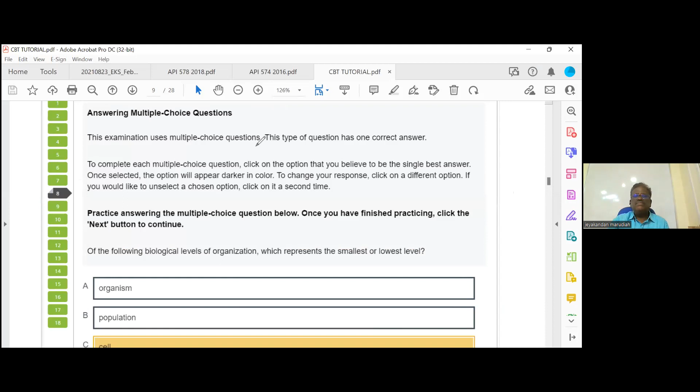So simple multi-choice. I told you about the API 570 exam. First one is closed book. You'll have 110 questions, and the time is 2 hours 45 minutes.

There are 4 patterns of questions they are using that you have to attend, but the majority of the questions will be simple multi-choice. So pattern A is simple multi-choice, and that will have around 100 questions. So out of 110 questions, 100 will be simple multi-choice.

So what is meant by multi-choice? You will have a question with 4 options. For example, of the following biological levels, which represents the smallest or lowest level? We have 4 options: organism, population, cell. You have to click whichever you think is correct. If you want to change the answer, any number of times you can change it. You can play with that - I can change to B, C, D, anything. The final answer picked will be what the system records.

Almost the same simulation we have on our website. So if you go to our website, oe.boonindia.com, we'll have a set of questions. For example, let us start with this. I think most of you have NDT knowledge.

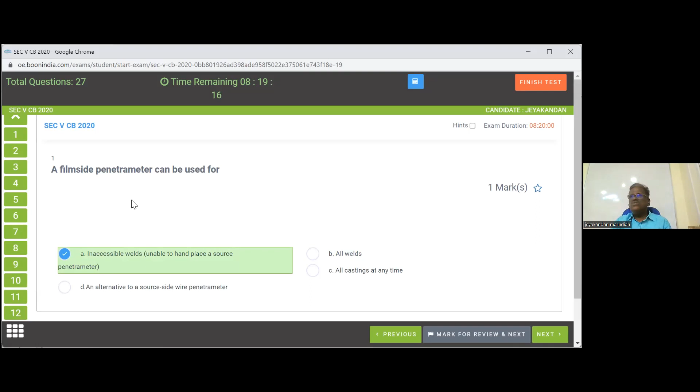Suppose if you want to change it, you can. The exam works the same way - you have to attend the question, then click next to move on. Once you attend the question, you can change it and there will be a color change. Even in the exam, suppose you want to directly attend the 12th question - you can touch that point and go there, then directly come back to the third question. You can jump here and there. Very simple system, no problem.

Suppose here it's not possible - but in the exam, you can highlight the question, strike through part of the question, or strike through the answers. All these are possible in the exam. So 90% of the questions, out of 110, 100 will be the same pattern.

Simple multi-choice question. We have 3 other patterns: multi-response, drag and drop, and extended matching. Together these will have around 10 questions - generally three questions like this.

Now, what is meant by multi-response? Let me finish, then you can write it down. Each question will have 2 or more answers.

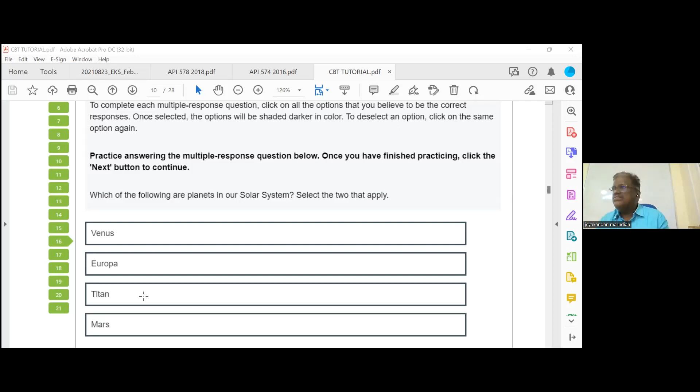So either it will not be 1 or it will not be 4 - all cannot be the answer, generally it will be 2 answers, sometimes rarely 3. Now the problem with attending this question is there is no partial marking - even 1 right and 1 wrong means 0 marks. So all answers should be correct. If the answer is 2, you have to pick both correctly. This is called multi-response. We will give you practice maybe at the end of the course.

Then the third pattern is called drag and drop. What is meant by drag and drop? We give some options, for example: December, horse, June, dog. We may have 1 box or sometimes 2 boxes, for example, months of the year and animals. So December and June are months of the year - you have to click it and drop it here. The system will work that way, so the answer sheet will look like this.

Months of the year, June, December, animals - again, there is no partial marking. Recently they changed a small thing in this. Instead of giving 2 boxes, they will give only 1 box. For example, they will ask only months of the year, so out of 4 you have to choose which are the months of the year. Is it clear? That is why I told you a simple multi-choice is 90% of the question.

So the remaining 10% can have a combination of these 3 patterns: multi-response, drag and drop, and finally extended matching. Extended matching means you have to match this - for example, put a line like this. So dog, canine; cat, feline; cow, bovine. How do you match it? You click this one, and whichever one you want to match, click that one, and the system will automatically draw the line.

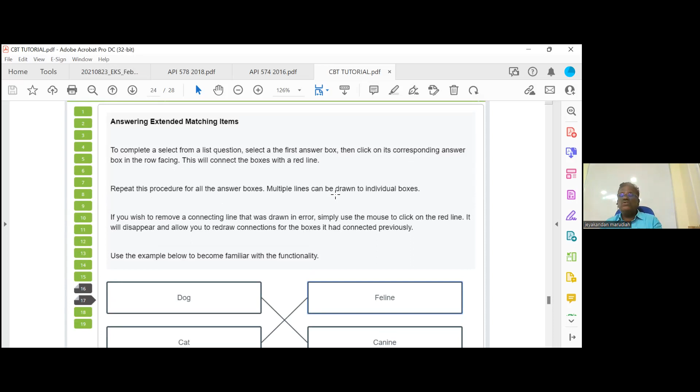This is important, what does it mean? Suppose this can match with 2 also - for example, if you want to make a line here and there's already a line, and this and this also feel like correct answers, click here and there will be another line also. It is not like that - exactly they will match this one. And if you wish to remove the connected line that was drawn in error, simply use the mouse to click on the red line, and it will disappear.

Once you complete the closed book exam, there will be a 45 minute break. Only 45 minutes is allowed, but you can come back before 45 minutes if you want. Then you can start the exam, or you can continue the exam without a break - that is also allowed. It's an optional break, because when you close that, the system will ask whether you want to continue the exam or close the exam. Generally, go for close. So go refresh yourself, go outside, then come back, and then you can start the next exam.

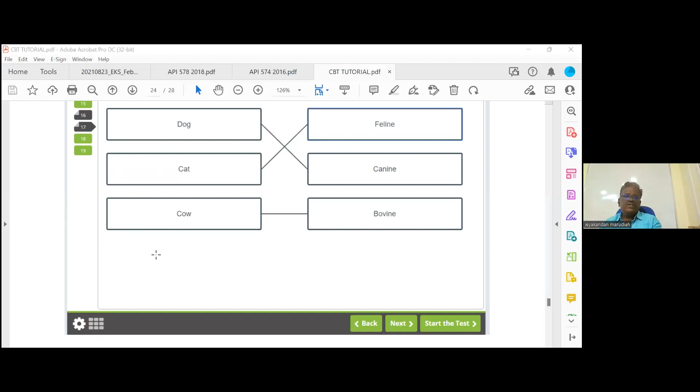What is meant by open book question? All the code books will be available in the system itself in PDF format. You can see the PDF format is for the 510 exam actually, 510, 571. So whichever code book you want to select, you can open it and go to the particular section and find the answer.

Now many people ask, can we use Control F? You cannot use it - it will be deactivated, it will not work. But all other PDF functions will work. You can click the content directly and it will go to the page - the HTML link from one area to another, all links will work in the PDF except Control F, point number 1.

Second question many people ask: how do I know which code book I have to refer to? There will be no indication. Third, people ask if it will be first this code book's questions, then the next code book - it is not, it will be completely mixed. So once you attend the class, you come to know by seeing the question, you can find it out. If you are fresh, it will be very difficult - but by seeing the question, you can easily find out which code book to refer to.

But some questions will have a little confusion because they are covered in 2 code books, so first you have to check one code book - if the answer is not there, then check another code book. But I can guarantee that if you attend our class properly, at least 50% of the open book questions you can answer without opening a book. Even in the open book exam, not all questions are tough - 50% of them you can find the answer just by seeing the question, without referring to the book.

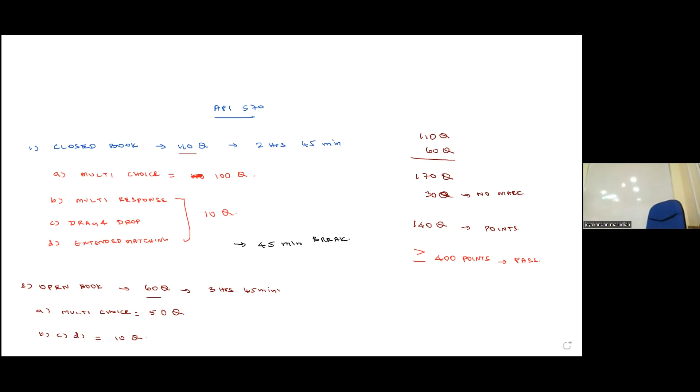Okay, shall we continue? The next thing is how to prepare for the 570 exam. It is purely a code book exam.

The first document you have to refer for your exam is called the effectivity sheet. This is the document you have to refer for your exam, which we've given you as printout or soft copy also you can get it.

This is applicable for all 2022 exams. Even if somebody is writing an October exam, there is no change - same syllabus only, same code books only. So what are the code books you have to refer?

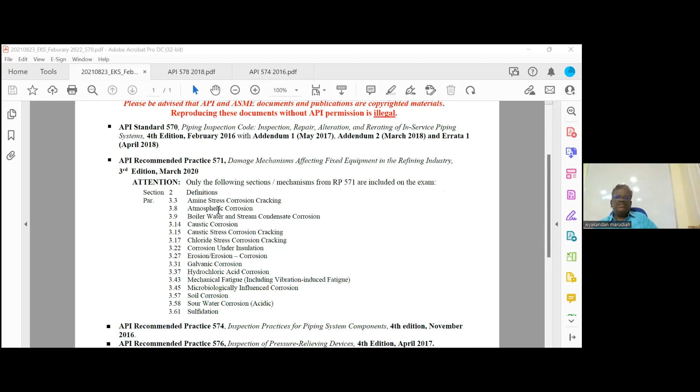570, the original edition is 2016 with the 2018 addendum. 571, we have 15 damage mechanisms. 574, and 576 has only a few selected sections. 577, that is the 2020 edition. 578, and on the ASME side we have Section 9, Section 5, B16.5, and 31.3.

So we have 1, 2, 3, 4, 5, 6, 7, 8, 9, 10 code books - we have 10 code books. The exam questions will be asked, generally at least one question from each code book.

But now, so many people think we have 170 questions total and 10 code books, so 170 divided by 10 is 17 questions each. It is not like that - all code books are not equally important. Only a few code books are more important.

For example, the general exam pattern is this - the general exam is asking most questions from 570. Around 85 to 90 questions will be asked from 570.

The second important one is 571, so 20 to 30 questions. B31.3 will have 15 to 20 questions. 574 will have 8 to 10 questions. 578 will have 4 to 6 questions. 16.5 will have 2 to 3 questions. 576 may have only 2 questions because it was recently included.

And then common codes - I highlighted these in red because they are common in the 510 exam and 653 exam also. Section 5 will have 6 to 8 questions, Section 9 will have 8 to 10, and 577 will have 6 to 8 questions. This is the general pattern, but they use around 6 to 8 different sets in the exam.

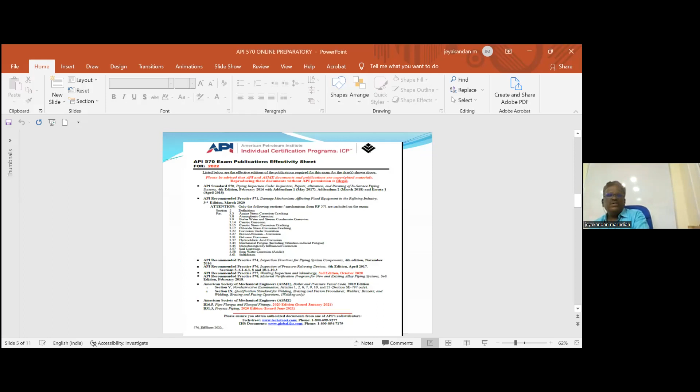Pressure, this is not referred for you, it is 570. So we will have PSI and PSIG. What is the difference when PSI means pounds per square inch? PSIG means gauge pressure, but everywhere we are using the gauge pressure only. So this is one important point.

And temperature, the exam question will be based on Fahrenheit. We are familiar with centigrade. No need to convert, just try to remember in Fahrenheit, try to remember in PSI. So if you want conversion, this is the conversion: Fahrenheit is equal to degree centigrade multiplied by 1.8 plus 32.

And the thickness, very very important. You should know inch, foot, and mil. There are 3 units for the thickness. 1 inch is equal to 25.4 millimeter. 12 inches is equal to 1 foot. This is the symbol for inch, this is the symbol for foot. And 1000 mil or thou, both are same, is equal to 1 inch, or 1 mil is equal to 0.001 inch.

Then if you want mil to mm conversion, 40 mil is equal to 1 millimeter. This is the conversion. So you have to remember pressure in PSI, tensile strength also PSI, then temperature in Fahrenheit only you have to remember, and the thickness in inches, foot, generally foot we will not use. Inches everywhere we will use, and mil also we will use. Mil means 1000 mil is equal to 1 inch. Mil is a very small unit. Mil or thou both are same. Radiography IQI, we are using thou. That is same, mil, thou both are same.

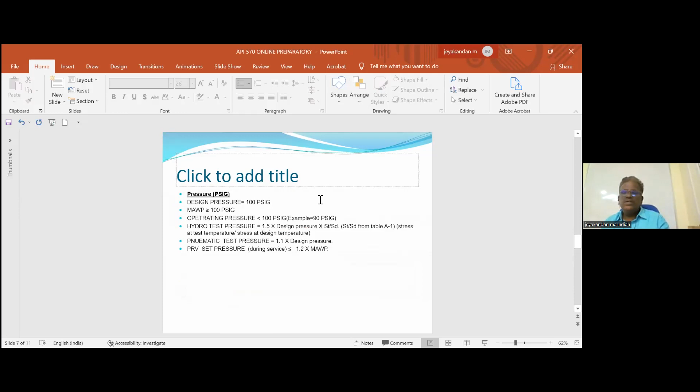So what is the meaning of less than, say, 3/4 inch? Less than 3/4 inch means, is 3/4 inch included or not included? Not included. So you have to understand the code. Less than means 3/4 inch, not included. So if it is less than or equal to 3/4 inch, then 3/4 inch is included.

Okay, another standard code terminology is, for example, 1 inch through 2 inch. What is the meaning of this? Now, is 1 inch included or not? 2 inch, so both 1 inch and 2 inch are included. So through means both 1 inch and 2 inch are included.

Next one, greater than 1 inch. What is the meaning of this? Greater than 1 inch, is 1 inch included or not included? Not included. So you should be very careful. There will be 1 or 2 questions testing this type of code interpretation. Okay, the answer will change, so you have to know greater than 1 inch means 1 inch not included.

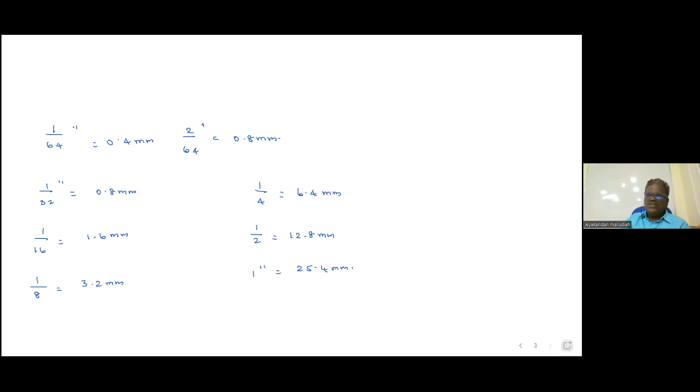The next question, what is the difference between pipe and a tube? So pipe, tube, we are using 2 terminologies. Pipe means the diameter. You know what is diameter? We have 2 types of dia, one is ID and another one is OD. Pipe, which diameter generally we mention? I always mention OD or ID pipe. OD. Pipe means if the diameter is expressed in NPS, that is called a pipe.

Tube means if the diameter is expressed in the actual diameter, that is called a tube. For example, if you put NPS 2, that means pipe. OD 2 inch, that is tube.

When you are putting NPS 2, you should not use the inch symbol. NPS means nominal pipe size in inches, so inches is already part of the NPS. So if you write it with inches, that is not correct. For example, you should write only NPS 2, that is the correct way to write. If you write NPS 2 inches, then this is wrong.

For example, if I write OD 2 inches, then it is considered as a tube. This is considered as a pipe. Is it clear? What is NPS? Nominal pipe size in inches. We can tell mm also, mm we call it as DN. DN means nominal diameter in millimeter. But for API exams, we will use only NPS. Is it clear? Now the question is, NPS means whether it is ID or OD.

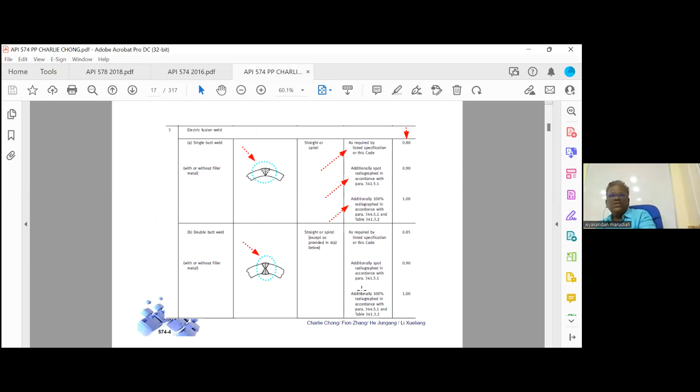So how can pipe be manufactured? Seamless, welded, cast. For our exam only, we will discuss seamless and welded pipes. Our exam scope is very limited - the exam question will be based only on carbon steel pipes, not stainless steel pipes. There will be no questions on that.

Now, what is the under tolerance allowed for the pipe? If it is under tolerance, it means thickness under tolerance. Dia under tolerance is there too, but it is not important for exam. Thickness means suppose you are ordering a 10 mm thickness pipe. When you receive the pipe, it is only 9.5 mm - is it acceptable or not? For seamless pipe, maximum allowed is 0.3 mm...

Sorry, seamless pipe - it is acceptable. Seamless pipe tolerance allowed is 12.5%. So even instead of 10 mm, if it is 8.75 mm, still it is acceptable. But if it is a welded pipe, only 0.25 mm is allowed. 0.25 means 10 minus 0.25 will be 9.75 mm it should have.

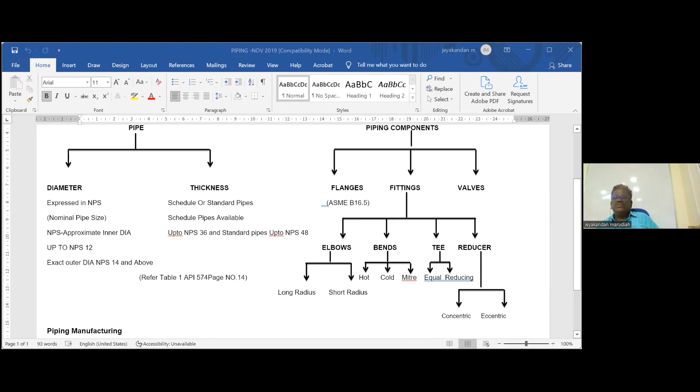Now if we come to the piping components, we have flanges. 16.5 is there, part of our exam. Fittings, we have elbow, long radius and short radius. Bend, we have hot, cold and mitre bends. T, we have equal and reducing T. And the reducer, we have eccentric and concentric. Then we have valves. This is the one I told you, we'll give printout, no problem.

Okay, now, what about the valves? What are the different types of valves we have? See, valves are covered in two code books actually. 576 also covers valves and 598 also covers valves. What is the difference with 598?

It talks about the flow regulating valves, not pressure relief valves. Pressure relief valves are covered in 576. Pressure relief valve is safety valve, relief valve. When the pressure exceeds, they will open. Flow regulating valve is gate valve, globe valve. This type of valves we call flow regulating valves.

I will play a short video, so just you can watch this. It will give some idea about the valve.

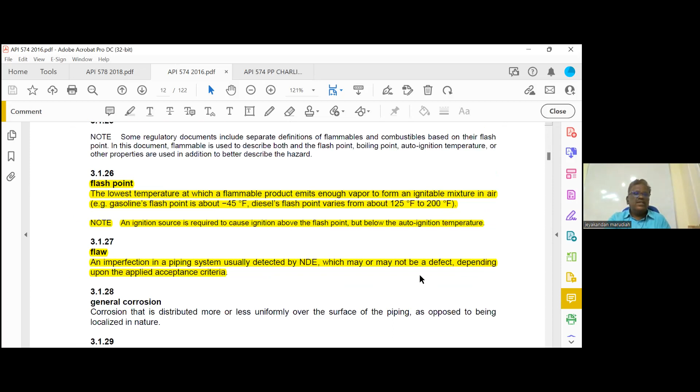Okay, right. So please take terms and definitions. These are not important. Straight away go to page number 12. Please take page number 12, piping components.

Right, see how our class system is. We have highlighted and printed. So we have edited some books, but some code books we have given a full book. Some code books we have edited, which is required for exam. Exam also will get almost same version only. They will not give the full code books, only required chapter only in the exam.

Second thing is, you can see it is highlighted and printed. And apart from that, I will have some underlined here. These are, you have to highlight it. That's why we provide you the highlighter. And some area there is a marking like this, CBQ. CBQ means closed book question. It was asked in the previous exam. That area you have to concentrate when you are reading for your exam. That is the way each and every code book you will go through it.

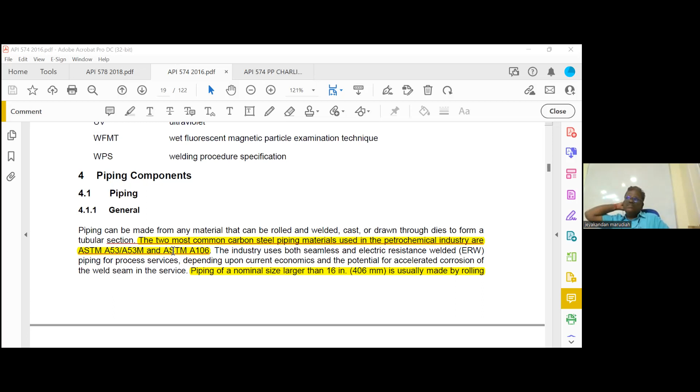So first, some of the important statements. Highlight the second line. The two most common carbon steel piping materials used in the petrochemical industry are ASTM A53 and ASTM A106. These are the two materials. Generally, your exam question will be based on A106 grade B, normally used material, or ASTM A53, sometimes ASTM A333 grade 6. Only carbon steel based exam questions will be there.

Then go to the next page. Second paragraph, highlight this. Pipe wall thickness are designated as pipe schedule in NPS up to 36 inches. So schedule pipes, we have up to 36 inches. This all I told in the previous session. The traditional thickness designation, standard weight, extra strong, double extra strong, differ from schedule and up to 48 inch. In all standard sizes, the outside diameter remains nearly constant. These three lines are important.

The size refers to the approximate ID of standard wall pipe, NPS equal to or less than 12 inch, and the size denotes the actual OD for NPS equal to or greater than 14 inch. So NPS 14 inch above, NPS means actual OD.

Page number 30, sorry, page number 13, second paragraph, highlight these 4 lines. The size denotes the ID for 12 inch, the size denotes the OD for 14 inch and greater than 14 inch.

You remember I told the pipe can be manufactured seamless, welded, cast. What is the under tolerance for seamless pipe? 12.5%. It was asked in the closed book question. So highlight this one, mark as CBQ. CBQ means it was asked in the closed book question. The actual thickness of seamless pipe can vary from its nominal thickness by as much as 12.5% due to manufacturing. The under tolerance for welded piping is 0.01 inch or 0.25 millimeter. Cast piping has the tolerance of plus 1/16 inch and minus 0 inch. So this is important, you should know the thickness under tolerance.

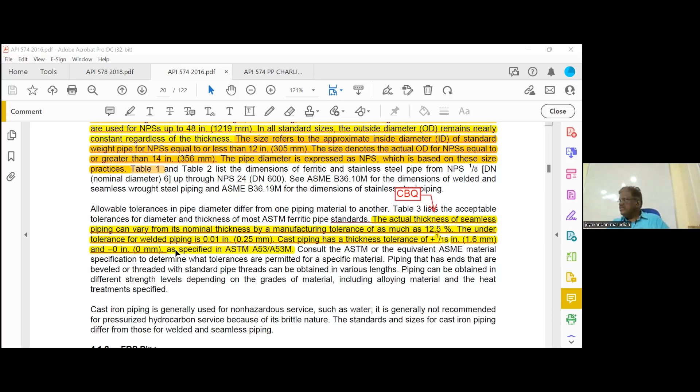Right, next page. You can see Table 1. This table you must use for your exam, open book exam. This table definitely you have to use, because for example, 14 inch - what is the OD of the 14 inch? It will be 14 inch NPS, but NPS 12 OD will not be 12 inch. It will be more than 12 inch. So what is the actual value? You have to refer this table and find it. So this is marked as an open book question. Let us see what are the important things.

I will go to the next page. For example, if we take NPS 6, next page, page number 15. What is the OD of NPS 6 in inches? NPS 6 outer diameter, what will be the outer diameter? 6.625 inches. Because remember in API, I told you 570, there is a thickness calculation, pipe thickness calculation.

The formula you have to use OD. Exam question, they never give OD, they will give NPS. So OD you have to find from this table, for example. They will ask exam question: what is the minimum thickness of the NPS6 pipe with the design conditions, some design condition? So the formula, there is only OD, you have to use it. OD you have to find from this table. So you can see what is the NPS6 OD - it is 6.625.

But you can see the thickness also in inches. For example, schedule 40 and standard will have a thickness of 0.28. If you have schedule 80 and extra strong, it will have the same thickness of 0.432. Then schedule 120 will have 0.562. So if you want to check some schedule or standard pipe thickness, again I repeat, we will always use inches, never millimeter. So in this table, NPS is important, actual OD in inches is important, schedule, class, and nominal thickness in inches - these are the things you may need for your exam.

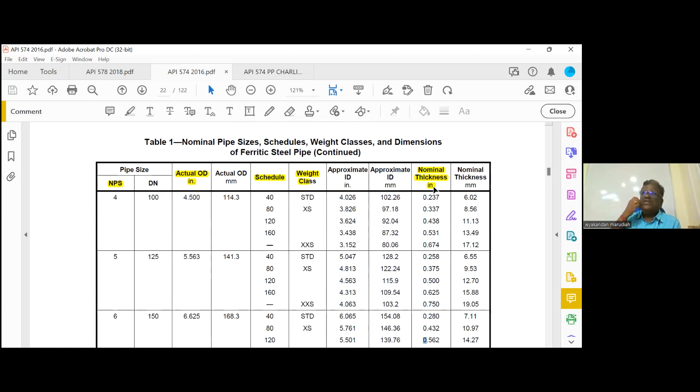You can see here, 6-inch OD 6.625, 8-inch OD - what is the OD of 8-inch? 8.625. 10-inch, 12, 14, 14 - so when it comes to 14, the OD will be the same. You see, after 14 it will be the same: 16, 16, 18, 18, like this.

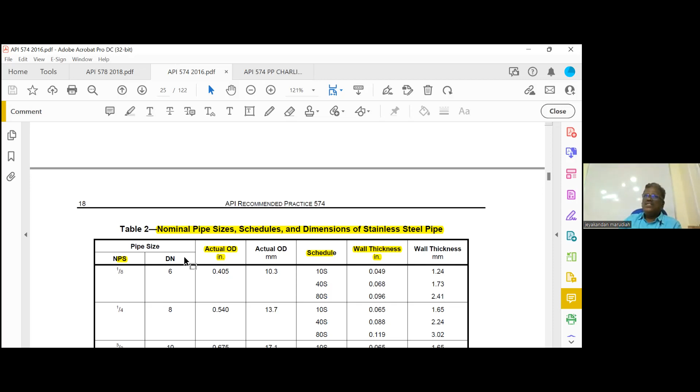Now go to page number 18. Stainless steel pipe. Stainless steel pipe schedule will have suffix S. For example, schedule 40 means it is carbon steel and low alloy. Suppose schedule 40S - S for stainless steel. Stainless steel have even schedule 5 also there - you can see here 10S, 40S, 5S also there. So for stainless steel, if anything, you have to refer this table.

But from the exam point of view, we may not use this table. Generally, the question will be based on carbon steel. Practically, if you are working with stainless steel, to find out the schedule thickness, you can use this table. Otherwise, these are not important.

Now, please go to page number 20. We are going to check two code books actually - one is ASME B31.3, second is API 570. What is the difference between B31.3 and 570?

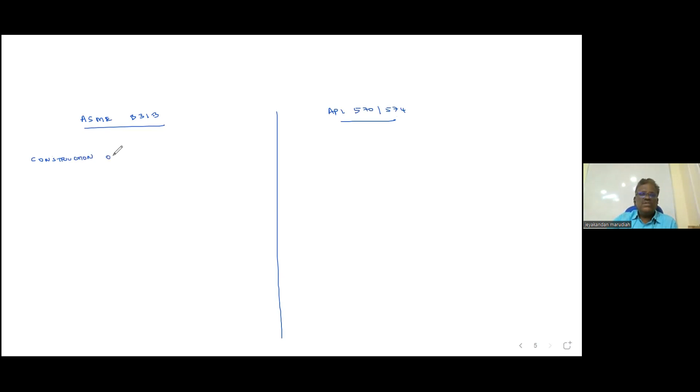B31.3 talks about the construction of piping, process piping. Whereas 570 talks about the in-service process piping.

So just to understand this, you can write after that. What is meant by construction? Construction means design, so you should have some basic knowledge about design. And then you should have basic knowledge about the material. Then fabrication, welding, NDT, PWHT, testing. Testing means after completing, you have to do hydro test or pneumatic test. Everything will be covered in construction.

In service means once it starts operation. So in service, what are the things? In service inspection, repair, alteration, re-rating - that is the in-service part. We will use these things repeatedly. We have a 10 days program, so the first time it may be a new word, but every time you repeat, you'll become familiar with it.

Now, construction - how is piping classified in the construction part? B31.3: first classification is based on COF. So what is COF? Anybody knows? Consequence of failure. What is meant by consequence of failure?

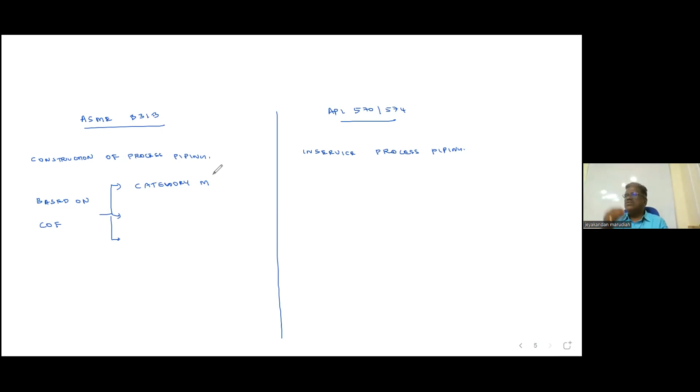So what is meant by category M? I will briefly explain, we will see in B31.3. Even a small leakage will have very serious consequence. For example, poisonous gases, highly flammable fluids like petrol. These are called category M. Just the opposite is what we call category D.

Category D means all utility systems. Utility means airline, water line. Even a major leakage will not have a serious consequence. In between, we call it normal fluid.

What is the definition of normal fluid? It is neither category M nor category D. Not highly dangerous, not no danger at all - it is in between. Now, majority of oil and gas piping will come under which category?

Normal fluid, answer is normal fluid. Majority of the piping - for example, natural gas, fuel gas, hydrogen gas, all gas lines - majority of the lines will come under normal fluid. Category M, only few lines come under that.

This three classification is only for our exam, but in B31.3 we have many classifications. Apart from that, severe cyclic piping - if you want, you can add severe cyclic also.

Severe cyclic means the pressure or temperature is fluctuating - that is called cyclic load. Cyclic means it is not a uniform pressure or uniform temperature, it is fluctuating frequently. That is called severe cyclic.

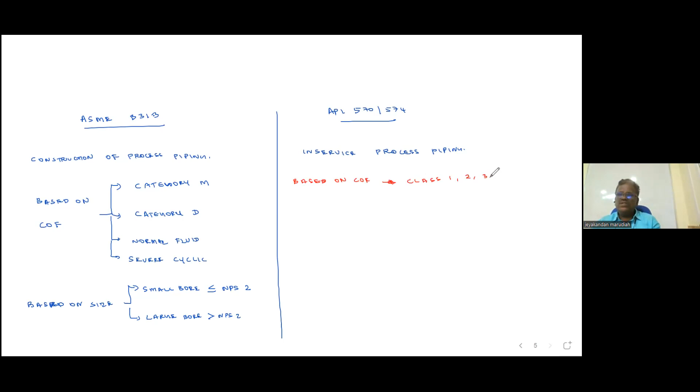In service piping, we are not using category D, category M language. There the classification changes: class 1, class 2, class 3, class 4. Highly serious is class 1, least serious is class 4 - it goes step by step. Class 1 is more dangerous, less serious is class 2, then class 3, class 4.

Then based on size: small bore, large bore. So the definition is same. What is small bore? NPS 2 inch and below - 2 inch is also small bore. Greater than NPS 2 inch, we call it large.

Now we have another classification also, based on processing - based on process we have three classifications: primary process piping, secondary process, auxiliary.

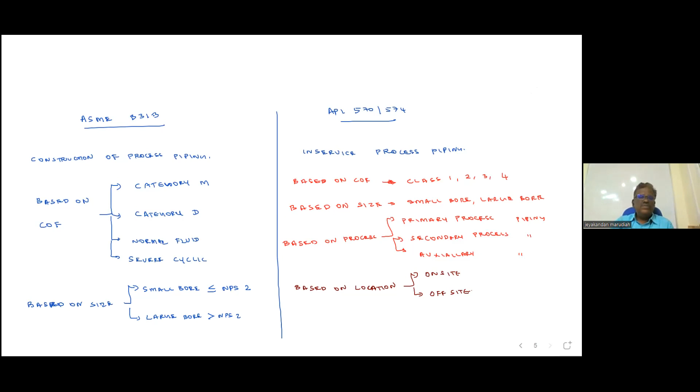Okay, now we will go back to this code book. You can see here, page number - small bore piping, secondary piping, and the auxiliary piping.

So small bore piping can be used as primary, secondary, or auxiliary piping. Nipples, generally piping nipples they are using, are 6 inch or less in length. When you are connecting a small bore piping, they will use pipe nipples that will be 6 inch or less in length. Just to highlight this one, these are not very important.

Then please go to the pipe linings, page number 23. Just a minute, time, page number.

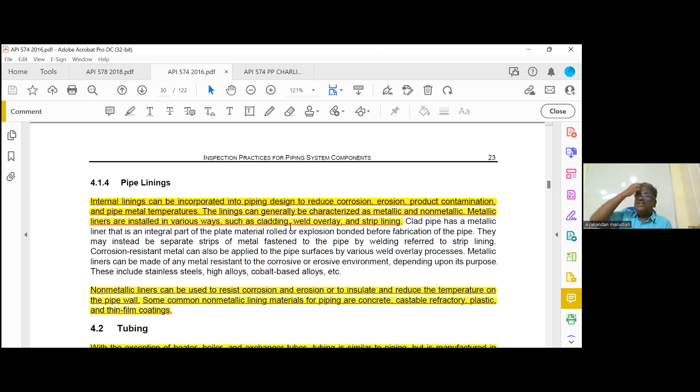Highlight this one. See why we are asking you to highlight - maybe so far there was no question asked in the exam, but every exam there will be a change, they will add some other area question. That's why these areas are important, that's why we are telling you to highlight these areas.

And non-metallic liners can be used to resist corrosion and erosion, or insulate and reduce the temperature of the pipe wall. Some common non-metallic linings for piping are concrete, refractory, plastic, and thin film coatings.

Highlight this also. Then what is tubing? So I already told you, tubing means two conditions: actual OD, actual thickness, small bore.

So with the exception of heater, boiler, and exchanger tube, tubing is similar to piping, but is manufactured in many ODs and wall thicknesses. Tubing is generally seamless, but can be welded. It is stated in terms of actual OD rather than NPS, so we are using the actual OD only, not nominal pipe size.

Tubing is usually made in small diameters and mainly used for heat exchangers, instrument piping, lubricating, steam tracing, and similar applications. So it is not used in the main process.

Now we will come to the valves. You have seen the valve video. Now just briefly, what are the things you should know about valves? So first...

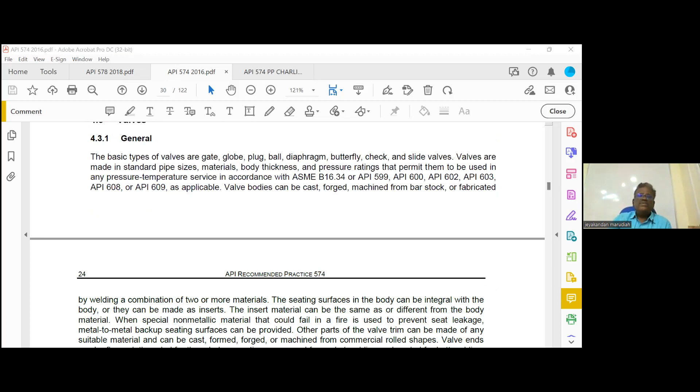Right, first gate valve. So these are called gate valves. What is the gate valve? Why is it called a gate valve? The valve with a gate - there is a gate which will be closed, between the wedge there is a mechanism to close it. So what are the important things you should know about the gate valve?

First thing is they should be used only in full open or full closed position. They are not for controlling the flow. You should not use it half open - you should be either fully open or fully closed. What will happen when you keep it half open? Any debris will hit the gate, will damage the head, then the valve will start passing even after closing. Gate valve should be either fully open or fully closed position.

Point number one. Second point, they should not be used for flow control. Now there are two types of gate valves: full area port gate valve or reduced port gate valve.

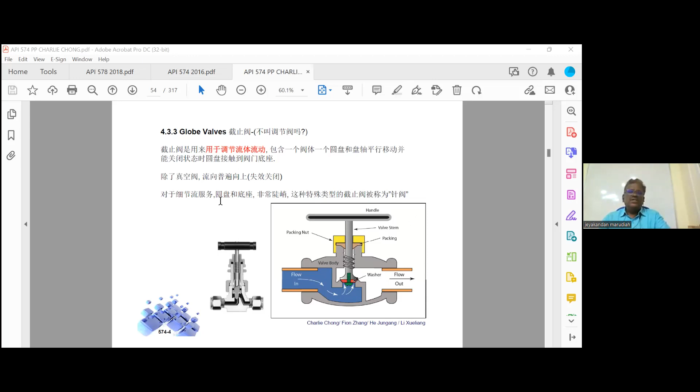Then another special valve is the diaphragm valve. What is meant by diaphragm valve? Suppose inside you have a highly corrosive liquid. When you use a gate valve, what will happen? The liquid, when the valve is closed, will be in contact with the gate, so it will corrode the gate, damage the gate. To avoid that, they will use a thin film as a barrier.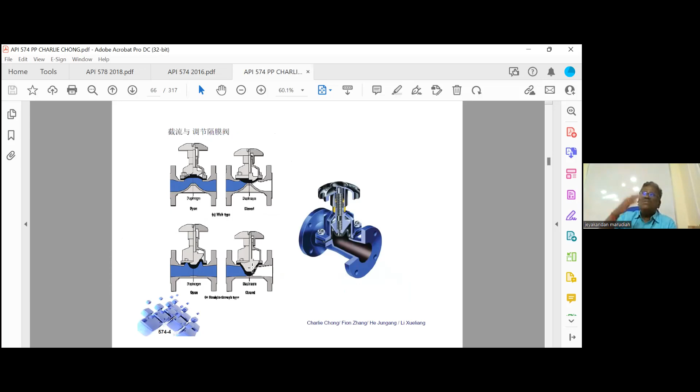You can see here, the black one is the diaphragm, and the blue one is the liquid. It will not allow the liquid to contact the gate, so it will protect the gate from corrosion. That is called a diaphragm. The purpose of the diaphragm valve is to protect from highly corrosive liquids.

Then butterfly valves, this we are using in the water line. What is the butterfly valve? Again, I told you, it's a 90-degree rotation valve, where we are using coarse flow control. What is meant by coarse flow? Even some leakage or passing will not cause serious problems. The water line need not be completely tight, even a small pass will not have a force, it's just flow control only.

Then finally, this is important, the check valve. What is meant by check valve? Non-return valve, which means flow in only one direction is allowed. It will not allow reverse flow. So we have swing check, piston check, and ball check valves.

Then slide valves, the gate is in high temperature. The gate is sliding, that is called a slide valve instead of moving. Now, these are the fittings and the flanges. So please go to the code book. Valves, just to highlight this one, gate valves, page number 24.

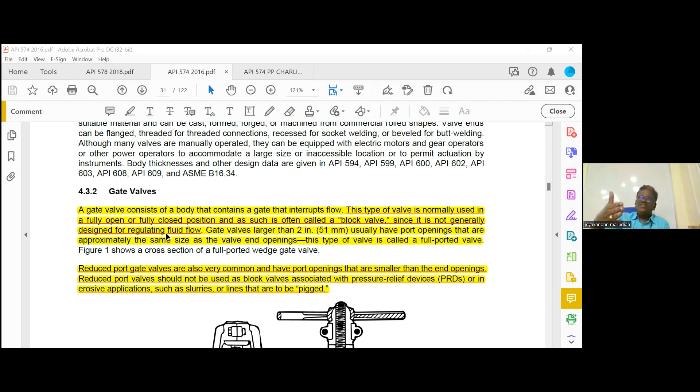A gate valve consists of a body that contains a gate that interrupts the flow. This type of valve is normally used in a fully open or fully closed position and is often called a block valve. There's another name for gate valve, block valve, stop valve, all are other names of gate valve. Highlight this one: since it is not generally designed to regulate fluid flow, why is it called a block valve? It will block, that's all. It will not allow regulation, small liquid will not be allowed.

Then highlight the second paragraph. Reduced port gate valves are also very common and have port openings smaller than end openings. Reduced port valve should not be used as a block valve associated with pressure-relief devices or in erosive applications such as slurries or lines that are to be pigged. When you are going to install here or launch a pig inside, reduced port valve should not be used.

Then globe valve. Highlight the first two lines. A globe valve, which is commonly used to regulate the fluid flow, consists of a valve body, circular disc that moves parallel to the disc axis.

And the fourth line: for fine throttling service, a very tapered seat can be used. This particular type of globe valve is referred to as a needle valve. That valve is called a needle valve, or when it's a small globe valve it's called a needle valve.

Plug valve, ball valve, these are not important. Then go to the diaphragm valve, page number 26. A diaphragm valve is a packless valve, 4.3.6.

Highlight the first two lines. It contains a diaphragm made of flexible material that functions as a closure and seal.

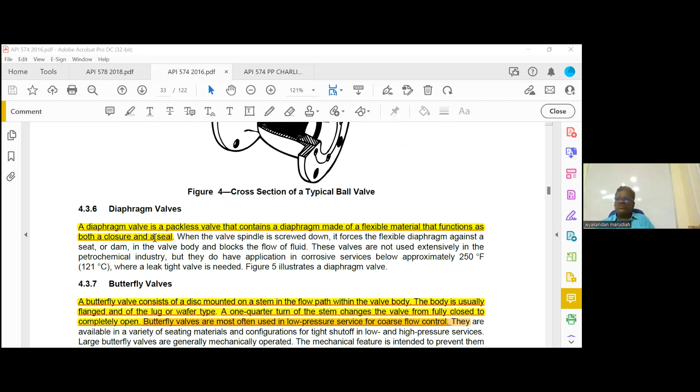Then butterfly valves. A butterfly valve consists of a disc mounted on a stem across the flow path within the valve. The body is flanged and lug-wafer type, 1/4 turn with stem. Butterfly valves are most often used in low pressure service for coarse flow control. That line is important, so they are used for not fine control, that is coarse flow control.

Then check valves, page number 28. A check valve is used to automatically prevent backflow. That line is important - what is the purpose of a check valve? To prevent backflow. The most common types of check valves are swing, lift, piston, ball, and spring loaded.

Then slide valves. A slide valve is a specialized gate valve generally used in erosive or high temperature service. It consists of a plate that slides against seats. So these are the fittings. These are not important.

Just skip this. Pipe support also skip. Then please go to page number 33.

Flexible hoses - this is important. See where we are using the flexible hose. For example, it is summer season, suppose you are running out of water, so generally what they will do is order a tanker lorry, water tanker. So I will transfer the water by using a flexible hose. So generally flexible hoses are used for temporarily transporting the liquid, or it can be permanent also.

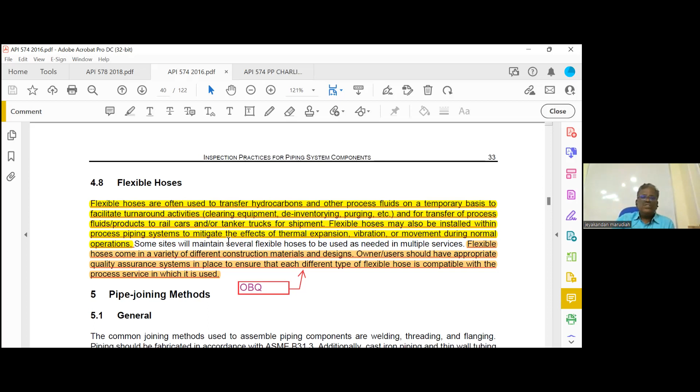Flexible hose may also be installed within the process to mitigate the effect of thermal expansion. This was asked in the open book question, the last 3 lines. Highlight it and mark it as open book.

Flexible hoses come in a variety of different construction materials and designs. The owner/user should have an appropriate quality assurance system in place to ensure that each different type is compatible. So the plant owner will decide what type of flexible hose you have to use with a particular system. This is the open book question.

Now, next one is pipe joining methods - how to join a pipe. So if you are straightly joining two pipes, what is this weld called? Butt weld or groove weld, we call it.

Then we can use a socket weld. So what is socket weld? They will insert a pipe inside and there will be a gap maintained - that is called a socket weld. So butt weld is generally preferred. Pipe to pipe, what we are joining is a butt weld.

So highlight this one - threaded joints. Generally we are using threaded also we can use, auxiliary piping in non-critical service, that line is important. You can use a threaded pipe. Even in our house, we are using threaded pipe, GI pipes, threaded pipes. That is a closed book question.

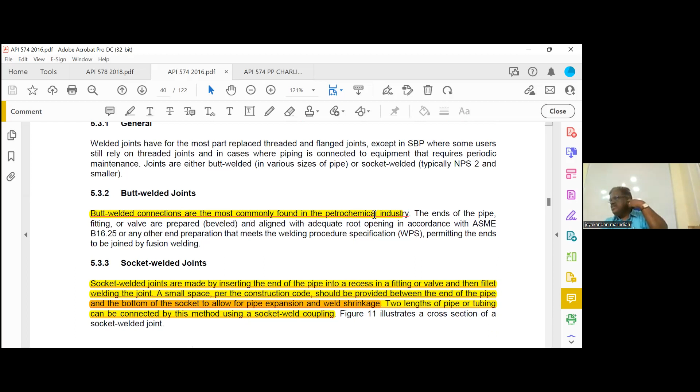Then welded joints, highlight 5.3.2. Butt welded connections are the most commonly found in the petrochemical industry. So we are using butt welding only for pipe to pipe joints. Then socket welded - socket weld joined by inserting the end into a recessed fitting and then fillet welding.

A small space, there will be a gap as per construction code. So what is the purpose? It should be provided to allow the pipe expansion and the weld shrinkage.

Then branch connections. Now, where will the piping generally fail during service? In the branch connection - only the branch connection will fail. A branch in a pipeline will take a beating because of the high stress. Highlight this one: a large number of piping failures occur at pipe-to-pipe welded branch connections.

That line is important, closed book question. Where will the failure come from? Pipe to pipe branch connections. The reason for the failure is often that they are subject to higher than normal stress caused by excessive structural loadings.

That's all introduction to piping. So this morning in just 1 hour we took introduction to API exams, then introduction to piping. So far in introduction to piping we have covered around 20 pages.

Maybe one question only from this. These are not important for the exam, but you have to understand what is meant by piping and what are the different components of piping. So far in exams they have asked where the failure will come - the answer is branch connections.

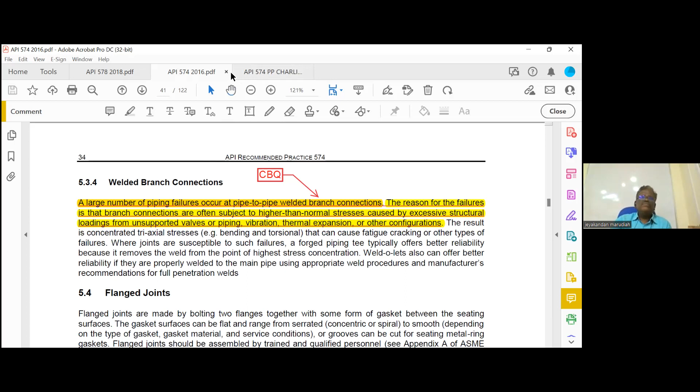Close this book. Please take API 578, material verification program. So we are going to start first with the material verification program, PMI. That is the first code book we are going to start. That was just the introduction we took.

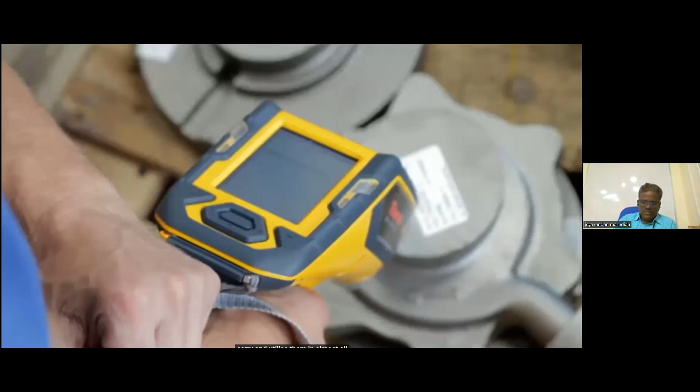Positive material testing of critical materials is no longer a choice but a necessity, including across the process, oil and gas industries. PMI, positive materials identification, is the most effective non-destructive means of ensuring that components utilized and or installed are to the correct specification, thereby minimizing any risk to equipment, facilities, personnel, or to the environment. Handheld XRF analyzers, such as those in the Niton range, are compact and lightweight, allowing operators and inspectors to carry and utilize them in almost all situations, including when working at height and even in the harshest and most challenging on or offshore environments.

Being able to move the equipment around the factory simply and easily is a real benefit to us. We have different areas of manufacture where we need to use it. Also, the speed of use is important in an in-process operation - we don't want to waste time or add time to the operation while conducting the use. Utilizing a range of analysis is very important to us. We use many different methods here, and we don't want to be setting the instrument up individually for different applications. I want to make it as simple as possible for the operator to grab the equipment and conduct the analysis.

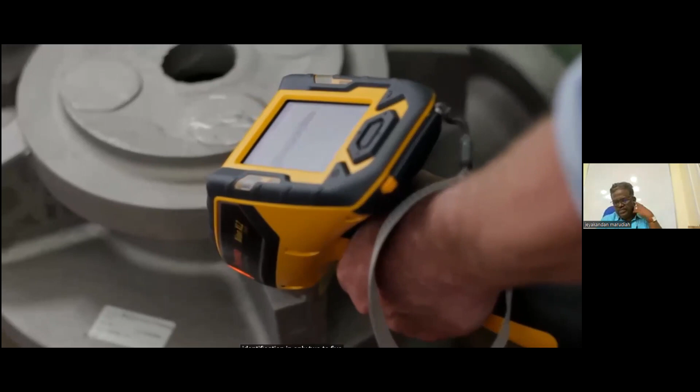The speed and accuracy of Niton instruments provide a laboratory quality chemical analysis and a positive identification in 2 to 5 seconds. Depending on contract requirements, we may have to do a positive material identification using the Niton equipment. This is usually done before the product goes into test to make sure it is the correct material before we proceed, usually with nitrile and various materials, working very accurately. It's extremely fast to use.

Niton UK's relationship with Sundyne HMD spans over 10 years, with the company having used 3 generations of Niton XRF analyzer, including the latest models. We've had a good relationship with Niton UK over the years. If there's a real problem, it gets resolved - it's easy to contact people.

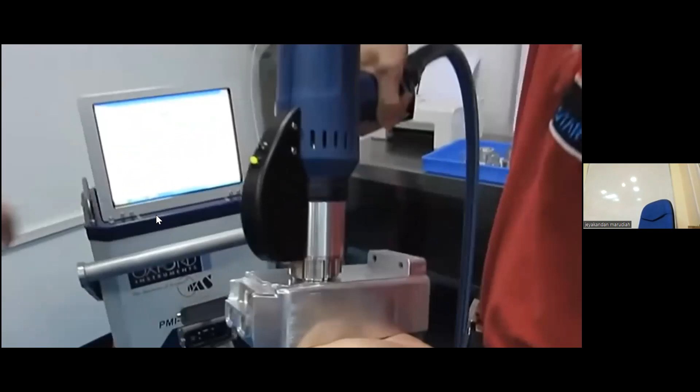Okay, we've already done 3 previous tests. This is the 4th test to get an average. The machine has analyzed the metal and it believes it is AlSi 0.5 when it should actually be 6061. So we're actually going to compare it to the 6061 database.

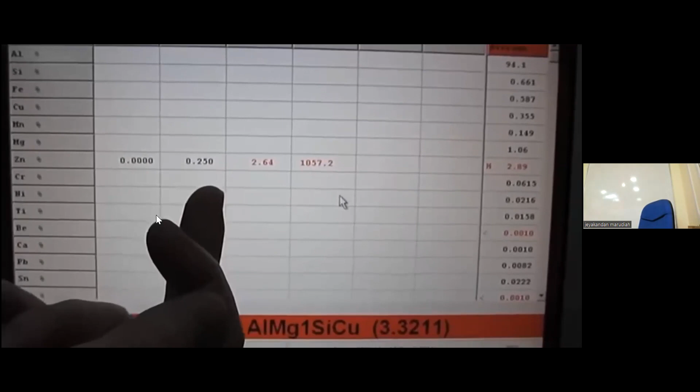Okay, now down the bottom here, we've got 6061 in red. Red means it is definitely not 6061. Above, it will show us where it is not 6061. The zinc should be between 0% and 0.25%. It's actually 2.64 points above where it should be. That's 1,000% too high. The actual average content is 2.89%. So we would actually reject this material as being 6061.

So this is yet another sample of 6061 supplied to us. Now we're going to do a test on it.

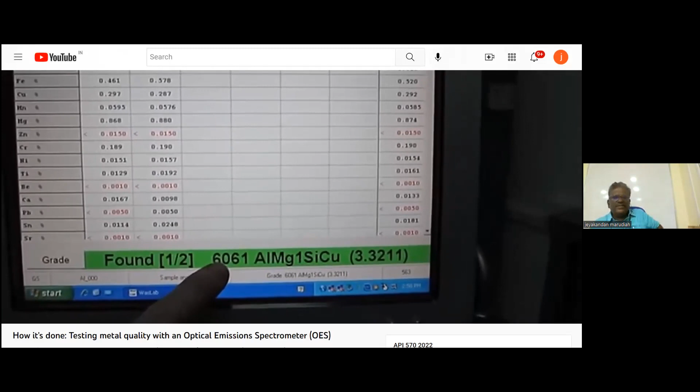That was the second of 2 tests, and you can see the results here. The machine has automatically compared the results to its database and determined that the material is indeed within specification for 6061. So now I'm going to print off that report, and whilst that's printing...

That there is the spark site on the finished part, and you can see some carburization. I've got some Scotch-Brite, and I'm just going to give it a quick rub. And as you can see, the witness mark is almost gone and it's smooth. We will ask customers where they want their spark site.

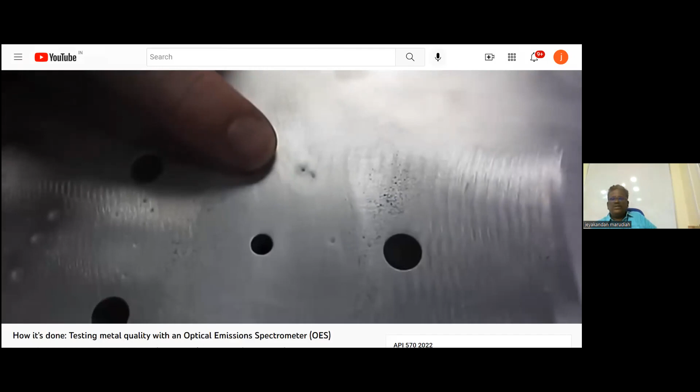Okay, this is the printout of the test results. We did 2 tests. It gives you the minimum, maximum according to the specification, and what the deviation is. We will actually put this in with the sample when we send it to the client.

Right, so the next one is laser-induced breakdown spectroscopy. LIBS is an analytical technique that has been used in laboratories for many years. Latest technological advances have made it possible to shrink LIBS into a handheld version. Most handheld LIBS analyzers are used for fast sorting of alloys in scrapyards, and alloy identification and analysis in various applications within the metals industry. How does LIBS work?

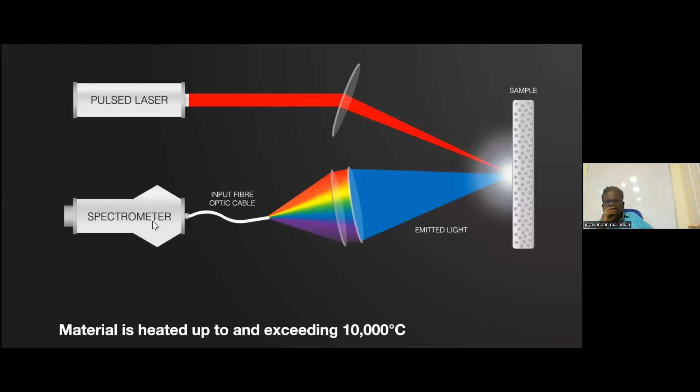During LIBS analysis, a focused pulsed laser hits the sample, removing a very small amount of material from the surface. The sample is hit by thousands of pulses during a typical 1-second measurement. The material is heated to and exceeding 10,000 degrees Celsius. The temperature is so high that the atoms actually break up and form a plasma. Despite these high temperatures, the sample does not get too hot during the analysis, so it can be held in your hand safely during the measurement.

What is happening within the atoms? When the high-power pulse laser hits the sample, the electrons in the atom's outer shells are ejected. Because electrons in outer shells are shielded by the inner shell electrons, they aren't strongly drawn by the nucleus. This means less energy is needed to eject electrons from the outer shells. The ejected electrons create a vacancy, making the atom unstable.

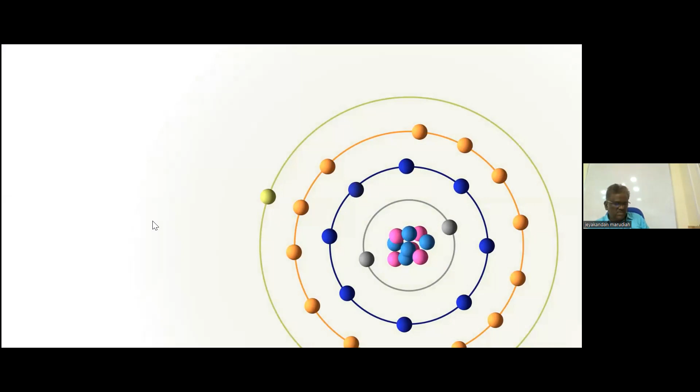When the pulse stops, the plasma starts to cool down, and the vacancy is filled by electrons cascading down from the outer electron shells. The excess energy released when electrons move between 2 energy levels or shells is emitted in the form of element-specific light. For a typical metallic sample containing iron, manganese, chromium, nickel, vanadium, and so on, each element emits many wavelengths, leading to a spectrum of up to thousands of peaks.

The wavelengths of light are collected through a fiber optic cable and then processed by the spectrometer. Each element is associated with a specific spectral peak. These spectra are quite complex, with potentially hundreds or even thousands of lines for each element. The concentration of the element is calculated from the intensity of the spectral peak.

Then an advanced algorithm is used to identify the sample type and calculate the concentrations.

Why do people choose the handheld LIBS technique? It is one of the fastest analytical technologies available today to identify and analyze metal alloys. It takes just 1 second to measure virtually any alloy, including aluminum alloys.

That's up to 20 times faster than handheld X-ray. The LIBS analyzer is very rugged because the detector is typically protected by sapphire glass, one of the hardest materials of the day, so you can safely measure sharp and pointy objects, including turnings and shavings. It is also very easy to use - just point, shoot, and read the results from the screen.

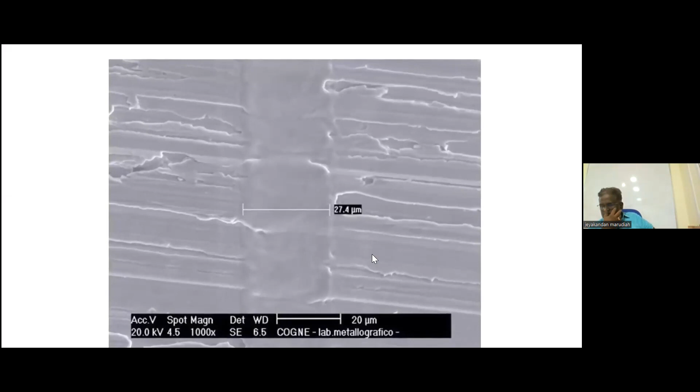The LIBS technique is virtually non-destructive. Following a LIBS analysis, the tiny burn spot left is so small it can hardly be seen with your eye. From a regulatory and licensing point of view, much less is required when the user deploys it.

Typically, no expensive licenses and time-consuming training classes are needed. However, it is important to check your local legislation issues, such as the use of safety goggles. We strongly recommend using safety goggles when operating a Class 3B laser device.

This is an excellent alloy identification tool which can also deliver the chemistry really well. If you want to know more about Hitachi High-Tech LIBS analyzers, visit our website.

Right, so please take the code book. These are the key points of what I said in the PMI.

Page number 2, please take page number 2. See, wherever there is an underline, please highlight it. Wherever there is a closed book or open book note, highlight it, mark it.

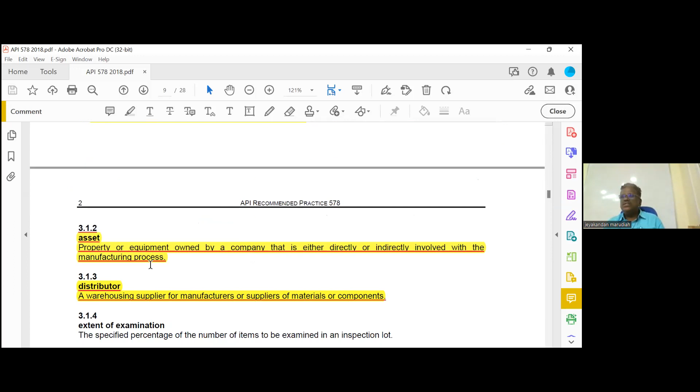So what is meant by asset? Highlight this: property or equipment owned by a company that is either directly or indirectly involved with the manufacturing process. Then, who is a distributor? Highlight: a warehousing supplier for manufacture or supply of the material or components.

Then heat - this is important, asked in the open book question. Heat means a batch of metal made at the same time, able to trace it to its original constituents and the manufacturing process.

Then lot - this is a closed book question, again very important. A group of items of the same type and common source from which a sample is to be drawn, and an inspection lot does not include more than one heat. That is a closed book question. So heat is important, lot is important.

Then material non-conformance, highlight this one, section 3.1.11: positive material identification result that does not conform to the material specified.

Then MTR, mill test report - this is a closed book question, important. A quality assurance document used in the steelmaking industry that certifies the materials comply with the appropriate standard, including physical and chemical specification and applicable dimensions. MTR also includes - MTR means mill test report. That is important.

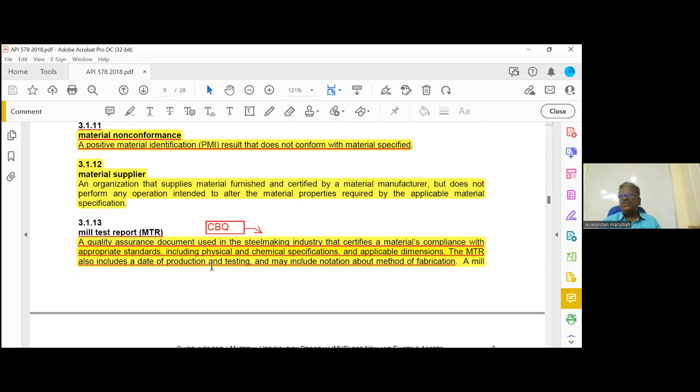The next page, representative sample, section 3.118: one or more items selected randomly from the inspection lot that are to be examined for acceptability.

Now, what is meant by standard reference material? This I didn't tell you. So what is standard reference material? See, for calibration, I told you we will follow manufacturer recommendations, but every day we have to check whether the machine is working properly. So we will have some sample with a certificate - 304, 316, like that - so we will check that one. That is called standard reference material. Okay, so that is important.

Sample material for which laboratory chemical analysis data are available and are used in demonstrating the accuracy and reliability of the instrument.

Weld button: a sample of welding filler metal deposited on a relevant base metal in order to provide a basis for the PMI. That is important, open book question. Again, I will repeat - wherever there is a question mark, just read it for the exam. These are very easy to score - exam code books, small code books.

Then highlight this one, page number 4, section 4.1: when considering the likelihood of material non-conformances, it is worth noting that historically the greatest number of non-conformances with serious consequence have involved unapproved carbon steel into low alloy steel. That line is important - generally, carbon steel and low alloy steel will easily mix up.

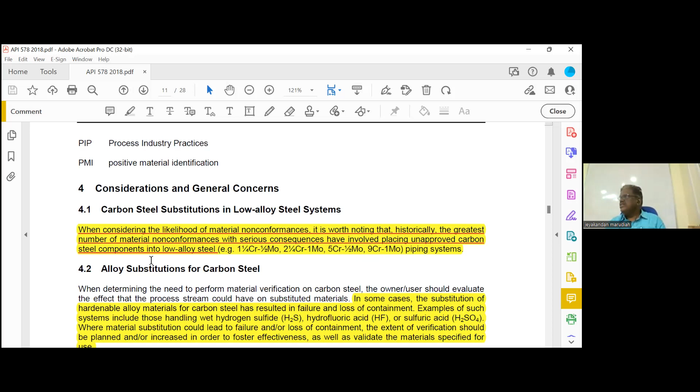Then this is an open book question, 4.3, second line: PMI should be considered by the owner-user depending upon the level of risk, probability and consequence, based upon the potential damage mechanism and the damage rate. That is a keyword - so based on the damage mechanism and the damage rate only, the PMI will be considered by the owner-user.

Then this paragraph, process unit susceptible to sulfidation. This is not important. Gasket material, highlight this one, first line. Gasket in incompatible service may result in premature failures. Suppose if you use a wrong gasket, then it can result in a premature failure.

Then material verification, 5.1, highlight the first paragraph. The owner user shall establish a written material verification program indicating the extent and the type of PMI to be conducted during construction on new vessels, retroactively on existing assets, and during the maintenance repair. So owner will decide how much we have to do.

For high risk items systems, the owner user should consider the need for employing higher extent of process and final examination up to 100% rather than random sampling, which may be done more appropriate for lower risk. So high risk, it should be 100%. That is closed book question.

So where we need a PMI, this all by the pressure parts, flanges, fitting, forging, bolting, all these things.

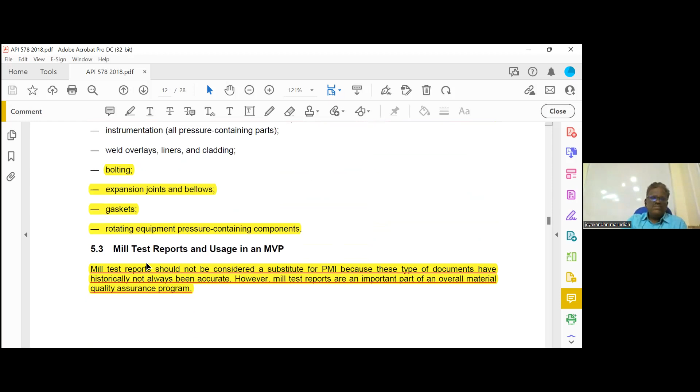Then highlight the 5.3, these 3 lines. Mill test report should not be considered as a substitute for the PMI because this type of document historically has not always been accurate. However, mill test reports are important part of overall material quality assurance program. So we need a mill test report, we need a PMI also.

Then 5.5.2, next page. Material verification test procedure. The owner user or designee should review and approve the material verification program and the testing procedure of fabricator, supplier, or third party.

Then this is in closed book question. A higher degree of PMI should be conducted on material supplied by stocking distributor due to the potential of unapproved material as a result of frequent handling by number of parties. So when you purchase from local distributor, we have to increase the PMI.

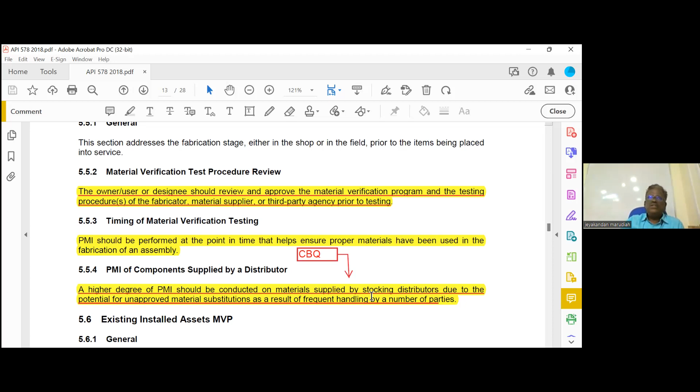And these are not important. Next page, page number 7. Reason for alloy specification. For example, some areas we are using stainless steel not for the integrity. For example, purity, milk product, food products, we are using stainless steel. All milk we are handling using stainless steel. That type, no need for PMI.

Only if there is a pressure, temperature involved, then only we have to do the PMI. So highlight this one. In some cases, alloys are used in the equipment system for reason other than corrosion resistance or structural integrity. In these cases, the mechanical integrity of system may not be compromised by material non-conformance. A material verification program may not be necessary in this system.

Two examples would be stainless steel lube oil system, which is stainless steel used for maintaining oil purity, or stainless steel in chemical manufacturing, where corrosion of carbon steel might cause product discoloration. That is open book question.

Then please go to the 5.73. Last paragraph. A material verification program should be directly applied to activities associated with receiving material into warehouse system.

Then page 9, second paragraph. The use of material verification program principles to check material received in warehouse system should be regarded as quality assurance practice to minimize the potential for discovering the alloy materials discrepancy during subsequent PMI. Within the warehouse should not be regarded as an alternative to PMI of fabricated assets.

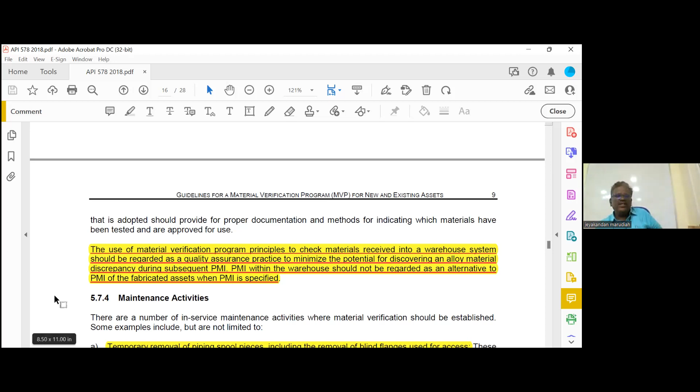Then A, suppose you are removing a temporary spool. Generally, it should be tagged. When you are reinstalling, you have to check proper tag is there. Suppose tag is missing, you have to do PMI and then install it. Highlight this one. Temporary removal of piping spool pieces, including removal of blind flanges. The fourth line: consideration should be given to material control systems such as tagging spool as they are removed, or the use of PMI prior to reinstallation to prevent these incidents from occurring.

Then C. Sometimes carbon steel pipes, they specify alloy steel valves. It should be properly communicated to the fabrication department. Otherwise, if they use carbon steel electrode, there is a possibility of cracks. So just to highlight, manufacturer distributor may substitute the low alloy valves for carbon steel in high temperature pressure service. And if this is not communicated, the craftsman end up using the incorrect welding procedure. This error may produce cracks in the new welds.

Then next page, page number 10, the first paragraph, third line. Identification of material by visual stamp marking alone should not be considered a substitute for PMI, but be an important component of overall quality assurance system. So we need stamping, we need color coding, we need a material certificate, we need a PMI also.

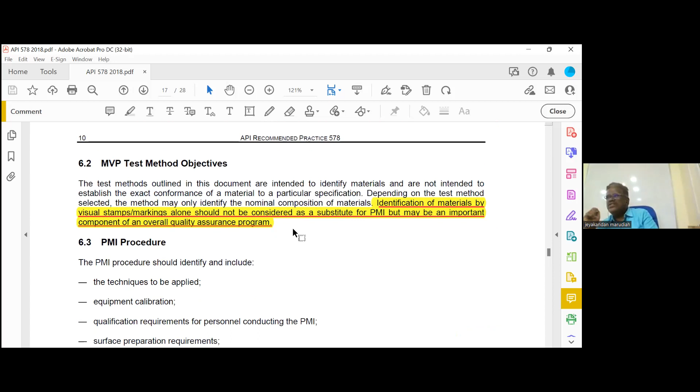Then these two are very, very important. These three paragraphs: the person performing PMI should be knowledgeable about all aspects of operation of the PMI equipment. So that is no, there is no level 2 qualification. They should know how to operate.

The second one asked in the latest exam. Qualification of the person performing the test, including training and experience, should be submitted for review and approved by the owner/user. Owner/user should approve that person is trained and qualified.

Okay, so that is too important. This also important: the owner is responsible to assure that all individuals performing PMI are trained, and owner is responsible. So owner should ensure that. Close book question.

Then we will go one by one through PMI methods. Chemical analysis: the chemical accuracy is typically much higher than that normally needed for PMI. Laboratory analysis may involve removal of significant amounts and is typically slower than field PMI. That's why we are not going for the laboratory.

The next page, this is important, page number 11. Resistivity testing, it is open book question. The principle employed in this testing method is known as the Seebeck effect, that was asked in the open book. So resistance principle, we are using the Seebeck effect.

What is Seebeck effect, or thermoelectric? A heated junction of dissimilar metal is created when the heated probe and the metal being tested are in contact with each other. The voltage generated at the junction is representative of the chemistry. That is open book question.

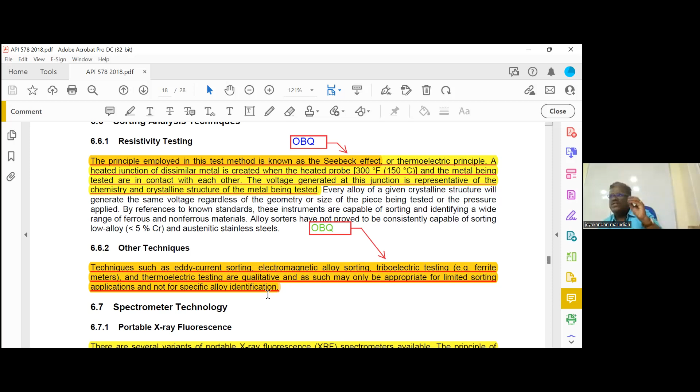Qualitative means not giving accurate results. Quantitative means accurate percentage. That is open book question. Then this is X-ray fluorescence, how it works. These are not important, please highlight this paragraph.

To get the near laboratory measurement, significant care regarding surface preparation and cleanliness is required, as contamination of the prepared surface can lead to inaccurate result. That is important. In X-ray fluorescence, there is contamination of surface. If it is not properly prepared, that results in inaccurate result. Highlight this one, that is open book question.

Bottom the second paragraph, from bottom second paragraph, this one. So the same paragraph last line: typically, a small test area is prepared with a portable grinding disc to properly clean the sample.

The next, the last paragraph also important. The inherent limitation of the technique means it is not possible to detect all elements. This excludes some of the important elements in carbon steel, such as carbon and boron. So our X-ray fluorescence cannot detect carbon and boron.

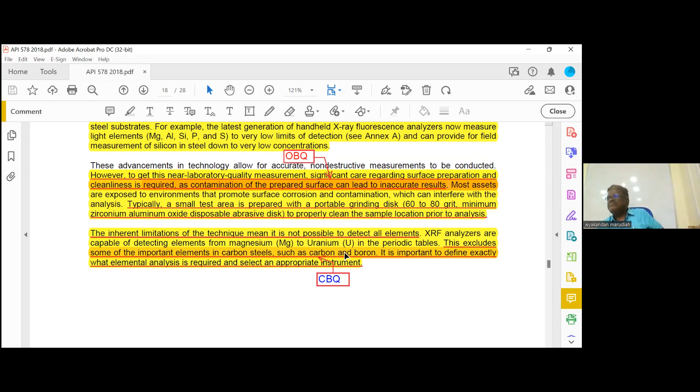Then optical emission spectrometry. So optical emission spectrometry: an electric arc, spark, or laser stimulates atoms in test samples. For each element, the combined light spectra from the different elements are passed through the light guide optical analyzer. In the analyzer, the light is dispersed into spectral and then measured.

So there are three groups, I told lightweight, heavyweight, laser induced. The first is the lightweight portable. These devices do not directly indicate the alloy grade or composition, but produce an output in the form of visible light spectra that permits semi-qualitative alloy identification. This technique is highly sensitive to operator skill and experience. So we need a highly skilled operator.

The second group is field portable laboratory grade analyzers. These are originally difficult due to their size. The significant advantage of this instrument is the expansion of elements that can be analyzed, including carbon. So the mobile unit can detect carbon, because the mobile unit is there.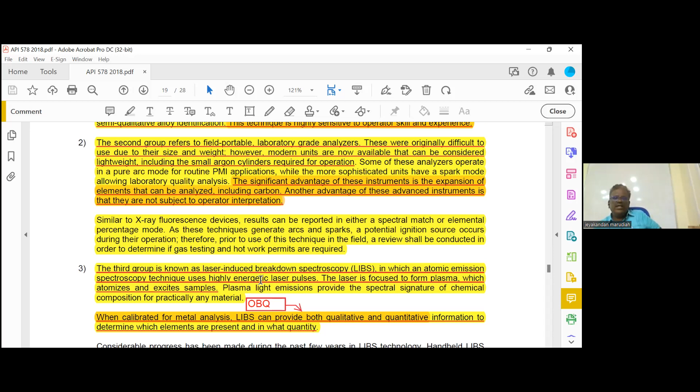Another advantage of advanced instrument is they are not subject to operator interpretation. Then this is important, third group: the third group is known as laser-induced breakdown spectroscopy (LIBS), in which atomic emission spectroscopy uses highly energetic laser pulses. The laser is focused to form plasma. When calibrated for metal analysis, LIBS can provide both qualitative and quantitative results.

That is an open book question: which of the following PMI techniques can provide qualitative and quantitative simultaneously? The answer is LIBS. It can give simultaneous results. Open book question.

The next paragraph, third line: the significant advantage of LIBS technology is wide element range. In principle, LIBS can detect all elements, limited by the power. So there is no limitation for this.

Then calibration, I already told you, this is closed book question. Person performing PMI should calibrate and verify the test equipment as specified by the equipment manufacturer. So follow the manufacturer recommendation. If the calibration procedures are not provided by the equipment manufacturer, they should be established by the owner user. Suppose the manufacturer doesn't say anything, you have to follow the owner user instruction.

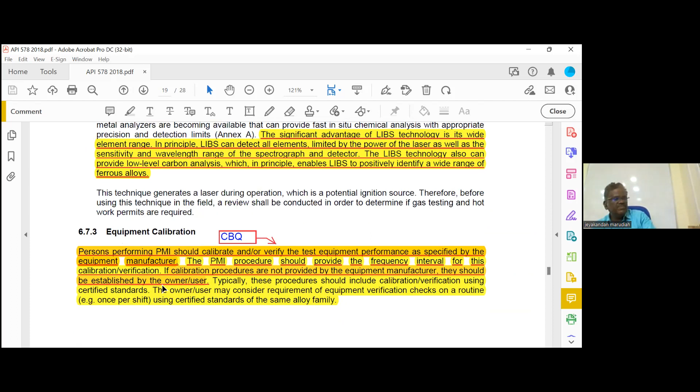The next page covers safety issues. XRF analyzers, section 6821, highlight these two lines. XRF analyzers are not intrinsically safe. Pertinent hot work procedures should be followed in areas where not intrinsically safe equipment is to be used.

Then safety, highlight this one. The user should be aware of potential radiation exposure hazard when operating an XRF device. That is an open book question. The user is expected to observe local jurisdictional requirements that govern radiation safety and to consult the manufacturer. So you have to follow the local government rules.

Then PMI of welding consumables. This paragraph is important. Prior to fabrication, a sample button should be welded using each heat of the bare wire, lot of covered electrode, or flux-cored. PMI can be used to confirm the weld material. So you have to make a weld button, particularly for SMAW electrode.

GTAW, no need. Highlight this one also. It is not necessary to test a button or bare wire if the test chosen can identify the composition.

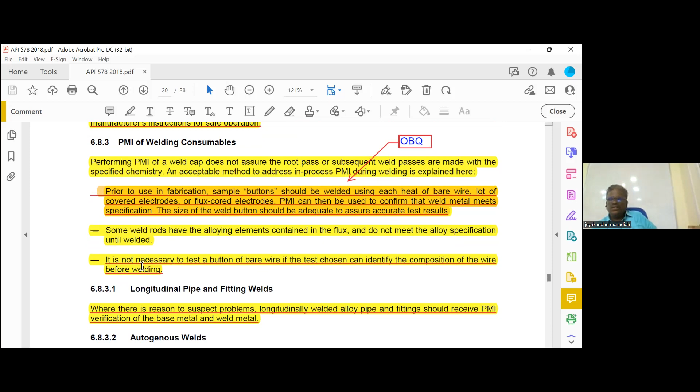Then longitudinal welded pipe: where there is reason to suspect a problem, longitudinal welded alloy pipe fitting should receive PMI at base metal and weld metal. So we have to do both.

Then autogenous - autogenous, I told you, means without electrodes. If the owner determines metal verification is required for autogenous welded alloy pipe or fitting with no added filler metal, it is necessary to conduct testing only on the base metal.

Then evaluation of testing results. Here there is one more important point. Suppose you do PMI and find a wrong material is used. What is the corrective action? You have to remove the material and replace it with the correct one. But what 578 says is, suppose a knowledgeable person like an engineer says even a wrong material in this particular service will work, then no need to replace it - you can accept a wrong material. This was asked in the exam.

When PMI indicates that alloying elements are outside the range indicated in the metal specification, the owner user may still choose to allow the use of tested material in situations where a person knowledgeable of the appropriate damage mechanism confirms that the material will perform satisfactorily in the service. That is a closed book question.

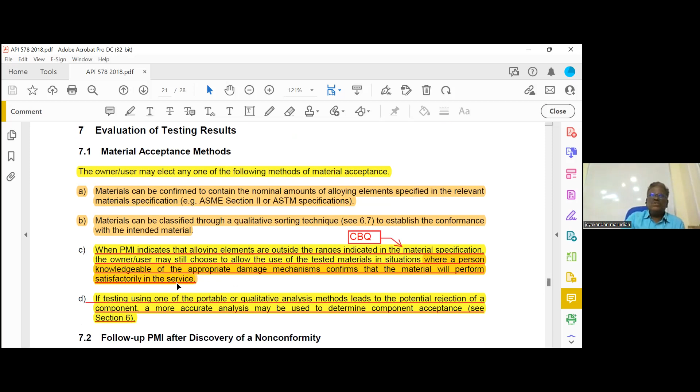Another scenario: a PMI shows wrong material, but you know 100% it is correct material. Then what do you have to do? You have to use another PMI technique to confirm it. Suppose your X-ray fluorescence is repeatedly showing one particular area as wrong material, then you can send it for lab analysis. Highlight this: if testing by portable or qualitative analysis leads to potential rejection of a component, a more accurate analysis may be used to determine component acceptance. We can go for detailed analysis.

Then section 7.2: if any one of the representative samples is rejected, all items of that inspection lot should be considered suspect, and a more extensive inspection of the remaining lot should be done. So in a lot, one rejected item means the entire lot is suspect, not rejected - we have to go for more detailed analysis.

Then how do I know PMI is done? Generally we can write 'PMI OK', or they will use some color coding. Highlight this: alloy material should be provided with acceptable identification - color coding, low stress stamp marking indication, and documentation showing both the PMI results and the PMI locations.

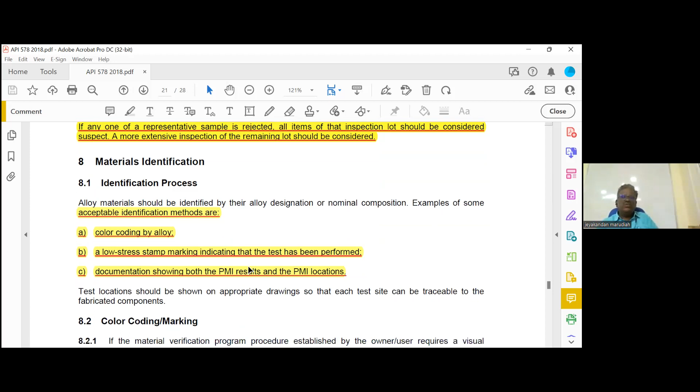The next page, when you are using markers - the marker should not contain additives such as metallic pigments, aluminum, zinc, lead, or chloride sulfur. That is a closed book question.

When you are using markers on stainless steel particularly, they should not have these materials. Highlight this one too, closed book: the individual performing PMI should obtain and follow PMI procedure approved by the owner. So only an owner-approved procedure should be used.

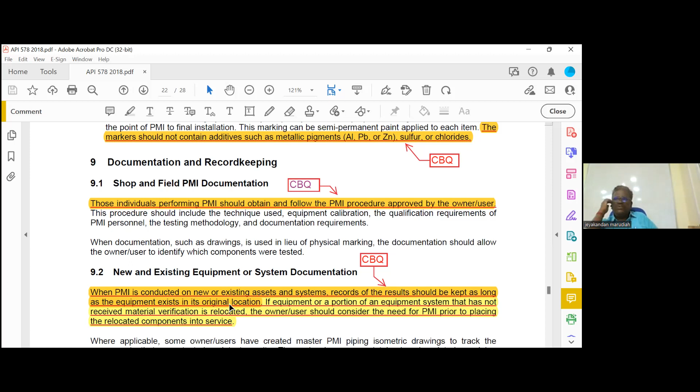Then how long do we maintain the PMI records? As long as the piping is in its original position. Highlight this: when PMI is conducted on new or existing assets and systems, records of the result should be kept as long as the equipment exists in its original location. That line is important: if the equipment or portion of equipment that has not received PMI is relocated, the owner should consider the need for PMI prior to relocation.

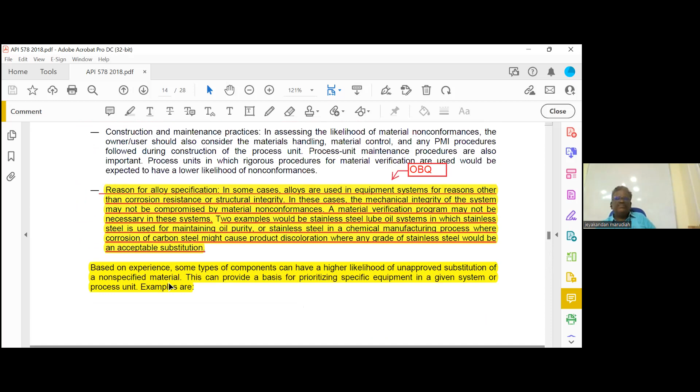That's all for 578. You can see here how many questions we marked. 1, 2, 3 - I am going in reverse - 4, 5, 6, 7, 8, 9, 10, 11, 12, 13, 14, 15, 16, 17, 18, 19, 20, 21, 22, 23, 24. So we marked 24 questions actually. Generally, exams will have 4 to 6 questions. Very easy to score - just read the highlighted points, very small code.